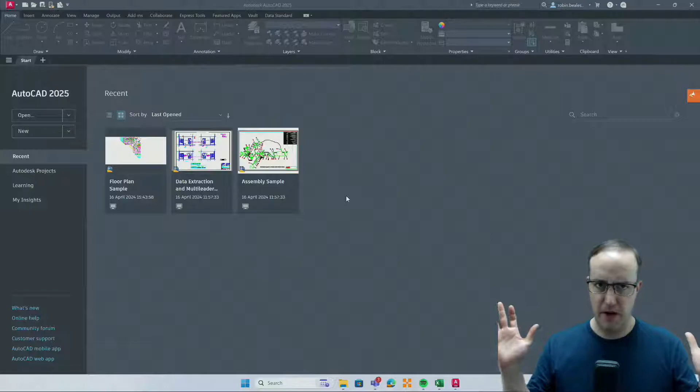So what I thought I'd do today is... I can hear myself. Am I coming through a bit loud? Or is it okay? It's fine. Okay, it's just my voice, clearly.

So what we're going to do today is actually focus on a product that we don't talk about that often. Every time we do these, we're kind of pushing the likes of Revit or Inventor, one of the more vertical Autodesk products, and sometimes we leave good old vanilla AutoCAD behind because there are more modern functions and features that I, as a self-confessed geek, want to push and talk about. But that doesn't mean AutoCAD as an application doesn't still hold a really important part in both construction and manufacturing workflows. And there's so many tools in there that people don't necessarily know about or don't make use of. So I thought today and maybe over the coming weeks I'd just give AutoCAD a little bit of love and go through some of the features that are maybe lesser used inside the application.

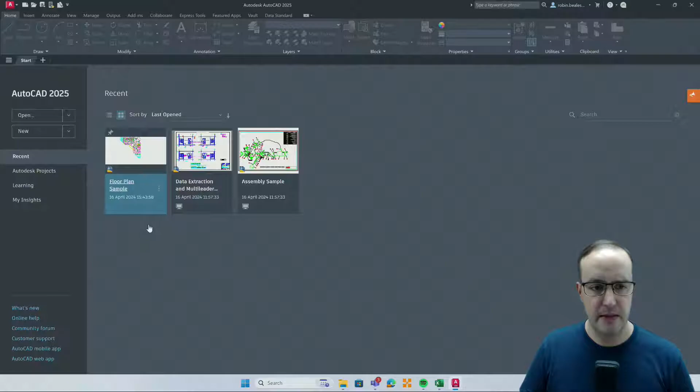Today specifically I want to focus on something called data extraction. Now what data extraction allows you to do is kind of self-explanatory - it extracts data from your DWG file, but you've got a number of controls in which you can tell AutoCAD what data you want to extract and how you want to extract it. So we'll have a little play with those tools today and show you how you can extract data and place it into a table on your drawing, or how you can extract data and link it out to an Excel file. Hopefully that gives you a workflow that, if you're using AutoCAD and DWGs in your day-to-day work and need to do some counting or extract some length or values from an attribute, this should give you a really nice workflow to do that.

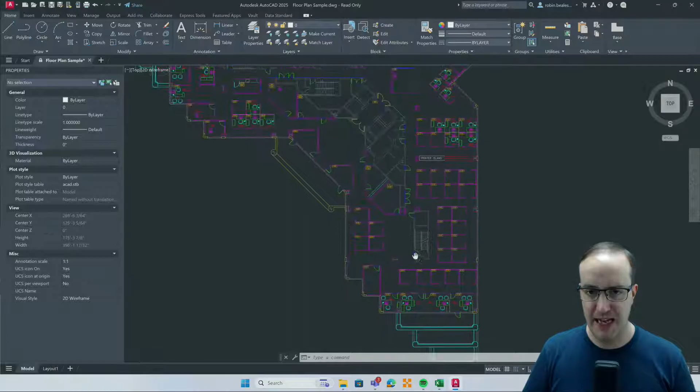So what I'm going to do is make my camera smaller, and then I'm going to share my screen. And without any delay at all, because we've got a button box that works really well, you can see my face in the corner and my screen.

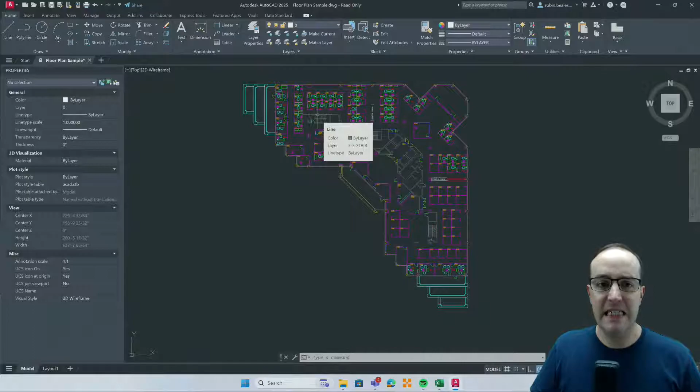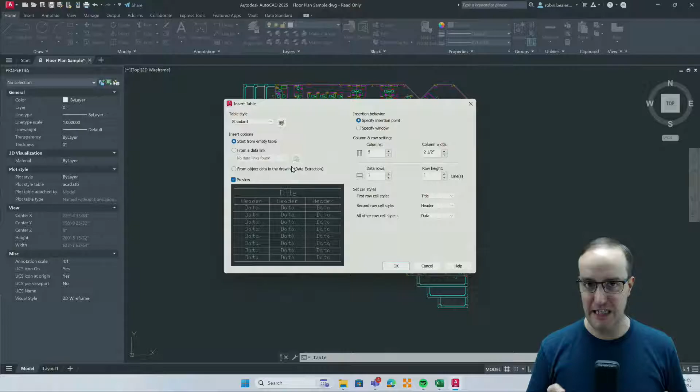So here we are, I'm using full AutoCAD, just plain old vanilla AutoCAD. But data extraction you can use in pretty much any version of AutoCAD. I think it's also in AutoCAD LT - Ellie, perhaps you can do a little check for me while I'm presenting, if data extraction is inside AutoCAD LT as well as full AutoCAD. I'm pretty sure it is, so whatever version of AutoCAD you'll be able to follow this process and work with it. Doesn't matter if you're on AutoCAD Architecture or any flavored version of AutoCAD, but I'm sticking with good old plain AutoCAD.

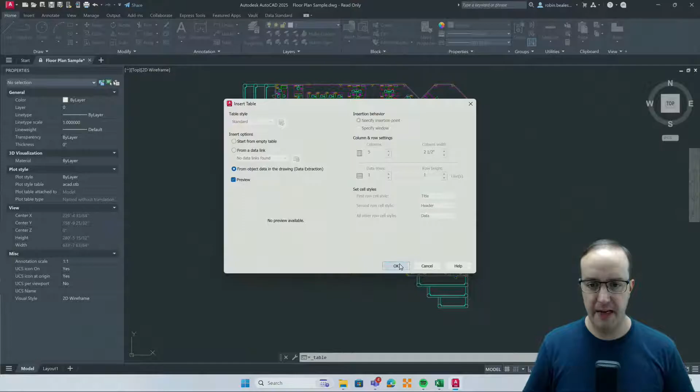Actually, I eat my words - AutoCAD LT cannot do data extraction, so you have to have a full version of AutoCAD. And to start off with, if you've watched these, I do try to air these most Thursdays - not always, but we're going to get better at it. We air these pretty much every Thursday, 2 p.m., same time. And as you'll know if you've watched any of these before, I like to do an example that you can follow along with. So I haven't got an all-singing, all-dancing data set made up with some demo candy in it.

I haven't got a load of singing or dancing demo candy looking great. I'm just going to use either a plain drawing or a sample drawing that you've got access to yourselves, which will allow you to follow along and hopefully keep it really simple and really easy to understand.

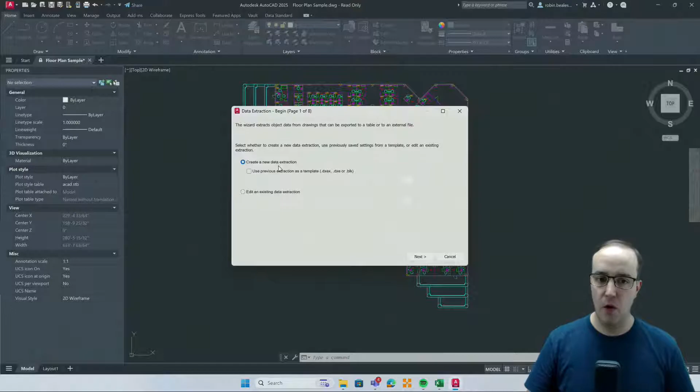So what I'm actually going to do is open this floor plan sample, which will open read only. If you don't have that on your recents, go up to the file menu at the top, go down to open, then sample files, and you'll be able to choose installed sample files and find it in there. I'm just going to open up the floor plan sample as read only, and in here, all I've got is a very simple floor plan.

But the key to the example I'm showing you is we do have a load of different blocks. This will give me my first good example of showing you how we work with this data extraction functionality. So all we're going to do first is just go through the process, and then I think I'll strip back the example and go through it in a slightly simpler way.

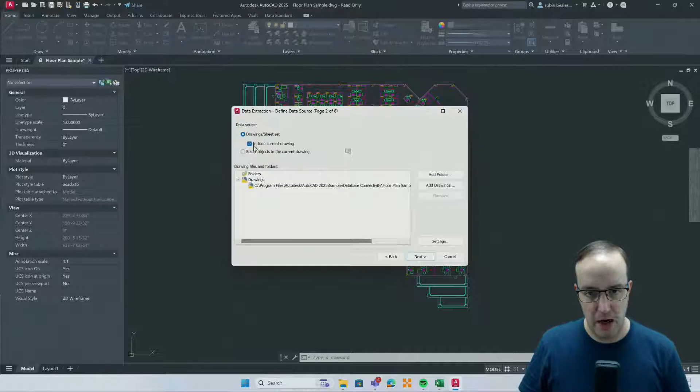So the first thing we want to do is start the data extraction, and there's a few different ways in which we can do that. If we go to the table tool up here, we can say that I want to create a table from object data in the drawing. For me, that's the easiest way to kick this off.

If you're extracting data, the likelihood is you're going to want to place that into a table, whether that's in AutoCAD or in Excel. Really, your first port of call is going to be, let's just get that data out into the table. So go ahead and start an insert table, and from there, go and choose from object data in the drawing.

From there, I'm going to press OK. You'll notice it grays out all of the other options. The reason it does this is because it doesn't know what we're extracting, so it can't tell us how many columns or rows it's going to have, because it's going to be dynamically generated from what you've got in your file. So press OK, and this will start the data extraction wizard.

And this will just talk you through several pages, and on each page, it's going to ask you a series of questions to determine what it is that you want to put into this table.

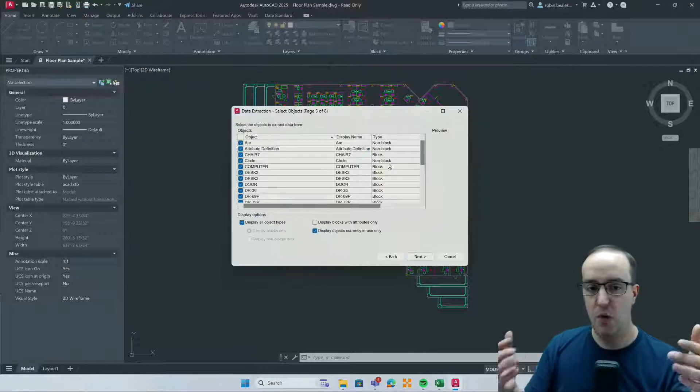The great thing about these data extractions, which I've always liked, is the ability to save basically these next 8 or so pages of wizards. And they're saved into these data extraction files. We can create a new one here, or we can use an existing one.

So I'm just going to say create a new data extraction, and I'm going to go ahead and save it on my desktop as data extraction, and press save. And then what we're asked is, okay, what would you like this data extraction to run on?

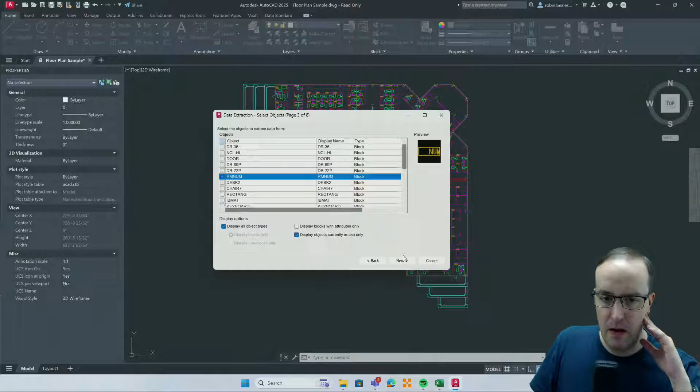Because although I am sat within this floor plan sample, I've actually got the ability to say that I want to run this on a selected area of the drawing, an entire drawing, or even several different drawings in one folder or across a series of folders. So we can set up one data extraction within one file, but have that extracting data from this DWG, that DWG over there, and really whatever the size of your data set, we can handle that using the data extraction process.

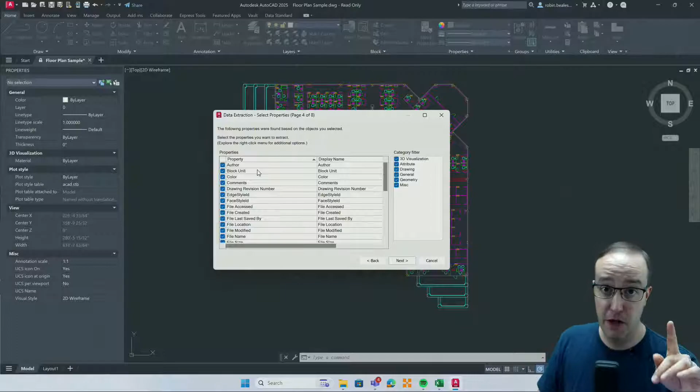In here, I'm just going to say, run it on this drawing for the purpose of today, it really doesn't matter, so just include the current drawing. You can go in and choose settings, and say that you want to specifically look at blocks, and whether you want to extract things if they are within an XREF, so on and so forth. I'm going to leave everything as default, and go ahead and press next.

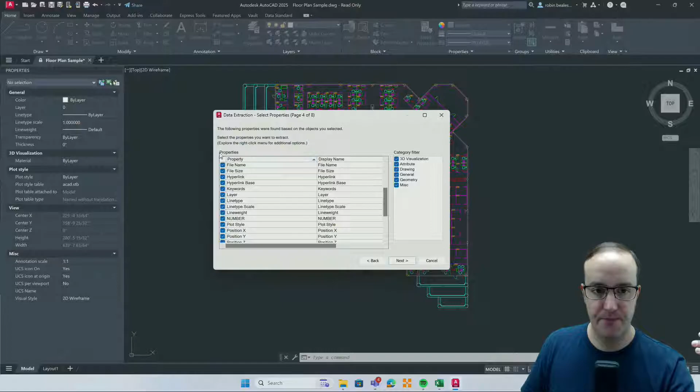This will look in the file that you've got open, in my case, this floor plan sample DWG, and it's now going to give me feedback based on the objects that exist inside my drawing and the type of object that they are. And you'll see that, probably unsurprisingly, we've got arcs, we've got circles, we've got lines, arcs, circles, squares. It's AutoCAD, right? So we're picking up base geometry, but it's also picking up on block geometry as well.

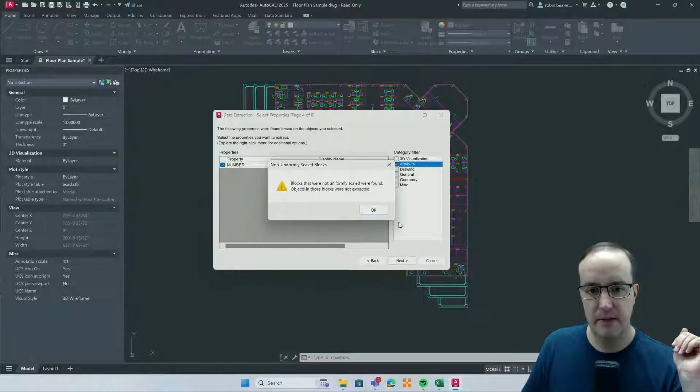So this is giving us a number of components that are either block-based or non-block based. And we can control and define what it is that we want to pull. And dependent on what we're pulling, it will give us different options and different pieces of data that we want to extract, which again is really, really nice.

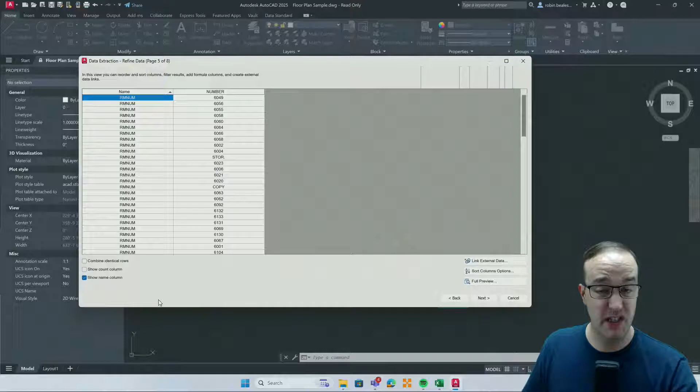So what I'm going to do is go and pick a couple of blocks for the purpose of this. So I'm going to deselect everything to begin with. So let's just go through and unselect everything. Wish it had a select all button. And then once everything has been deselected, I'm just going to look at all the blocks. So let's just stick all the blocks at the top.

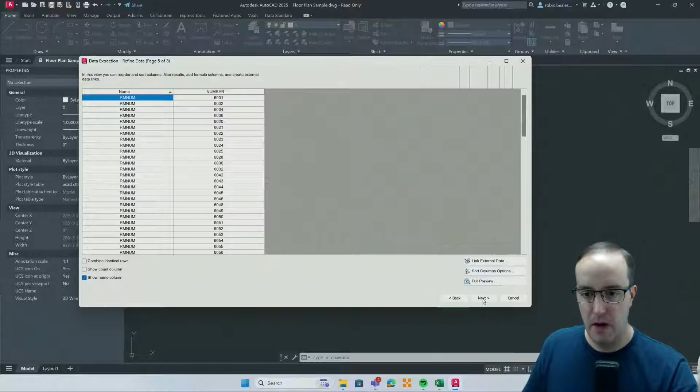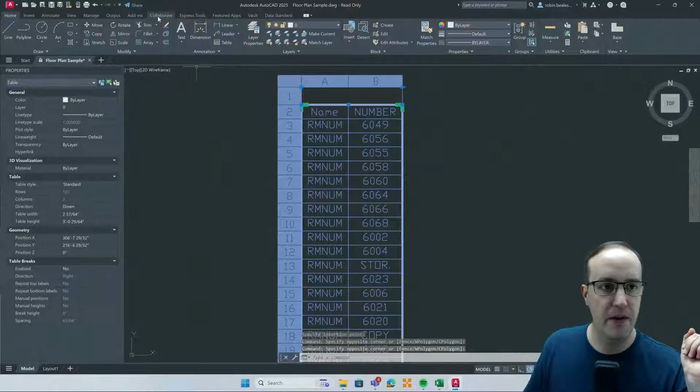And down here, I've got a room number block, rmnum. And then I think somewhere there's a name tag block. I think there was a name tag block, or I might be wrong. It might just be mtext actually from this perspective. So let's just pick up this room number block. Then against that room number, I want to click next. And then this is going to look at that particular object.

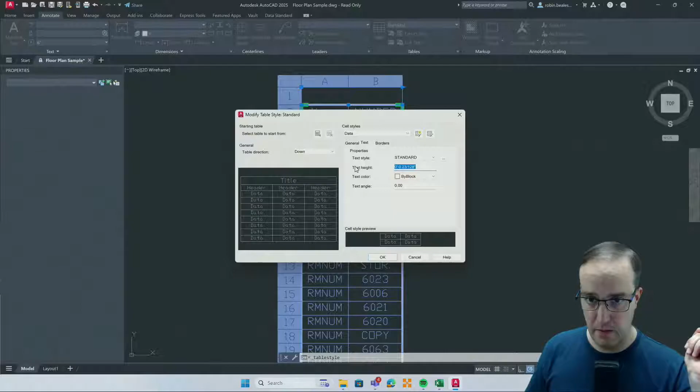And against that object, it's going to show me, okay, here are all of the things that you could pull from that particular block. So in this case, I can pull a number of properties that exist in the block, and I can also pull attributes. And for me, this is the key here: I can pull attribute block data from my drawing and stick it into a table, first and foremost, which on its own is really, really powerful.

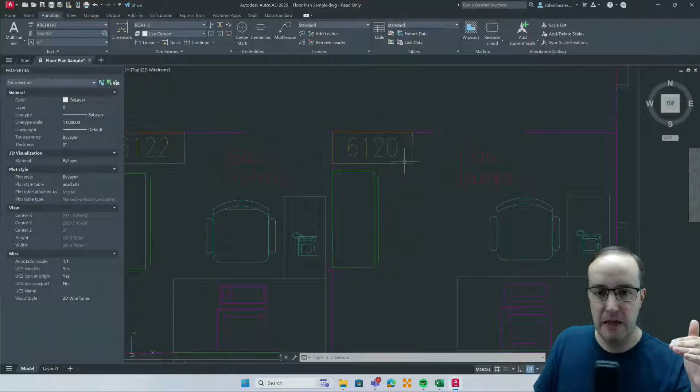So looking at some of these properties, we've got author, we've got the block itself, the color, hyperlinks, keywords, so on and so forth. We also have layer. So because this is understanding that a block is on a layer and has attributes, you could even filter your extraction to be only things on a particular layer or several layers, and we can start working with that data. Again, what I'm going to do is deselect a lot of these.

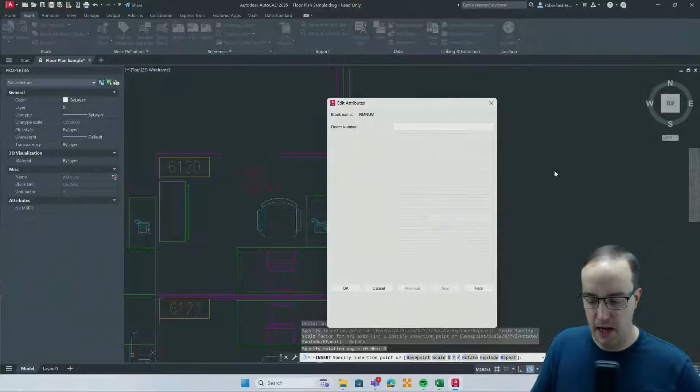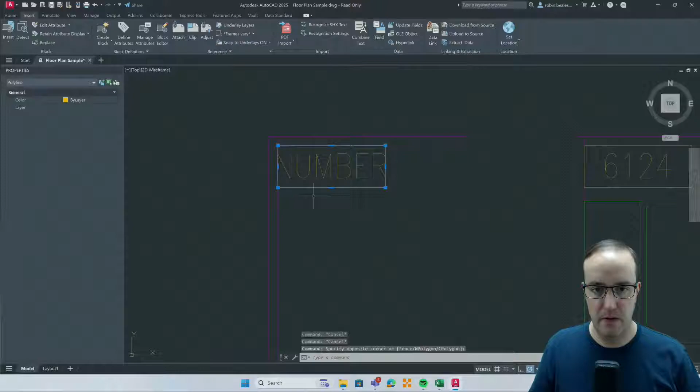You've got some filters on the right, so I can literally just say, do you know what? I just want to see the attributes in here, which are text-based attributes that are stored on that block. And I want to pull the number. I'm going to go ahead and press next. And then this is going to give me a list. So it shows me a count, a name of the block, and then my number, the number being my attribute.

I don't want to combine rows that are identical. I don't want the count column because it's going to be 1 for everything. And we don't really need the name column, but I'm going to put it on there. And what this is doing is it's showing me the block name and then any attribute value that comes next to that block, which is great.

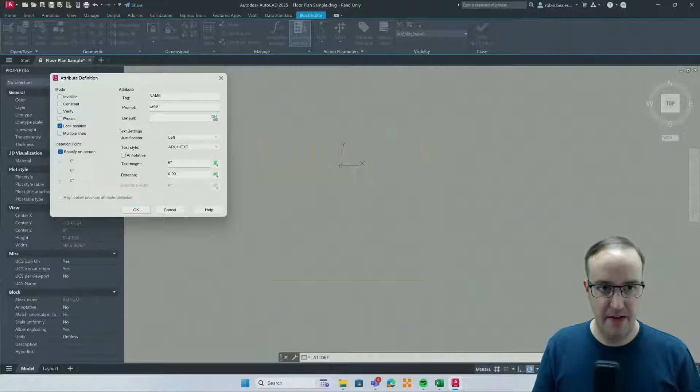I'm just going to go ahead and press next, say that I want to insert it into my drawing. Gives me a bit of a preview. I'm going to use the standard table style here. It's probably going to come in a little bit small. But if we just go next and finish, I'm going to place it over here.

If I just select it, grab the table style that it's using, which is standard, let's just modify that table style to make it much bigger for the purpose of this. Let's go with text, oh horrible, inches, something like about 25.

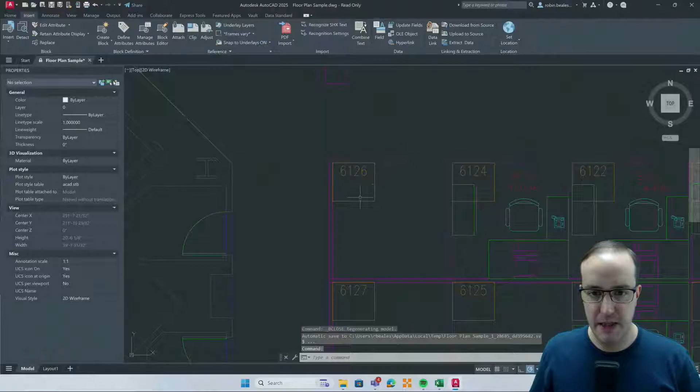And then I'll tell you what, I'll leave it small rather than going in and editing those and making a mess of things. I'll leave it small. So what I have is an AutoCAD table that's basically showing me all of my room numbers. At the moment, pretty useless, right?

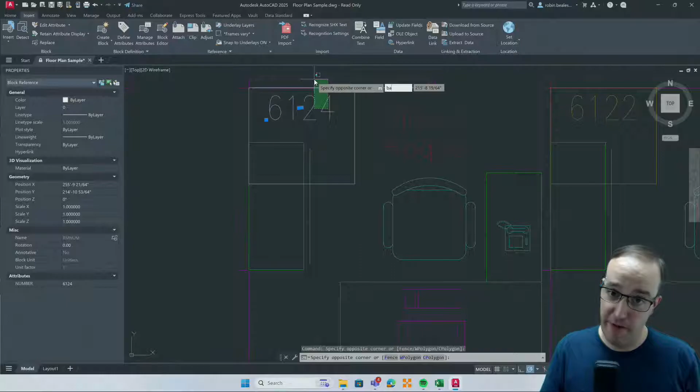But actually, imagine that your blocks are a little bit more intelligent and they've got a little bit more information on them. So if I come down here, these are my room number blocks. Okay, so this is what I've got. I've got a block that when I place that block, it's going to allow me to put in there the number of the room. So the way that works is I go to insert, I choose my room number block, which is there. I place it in and it will ask me what my room number is.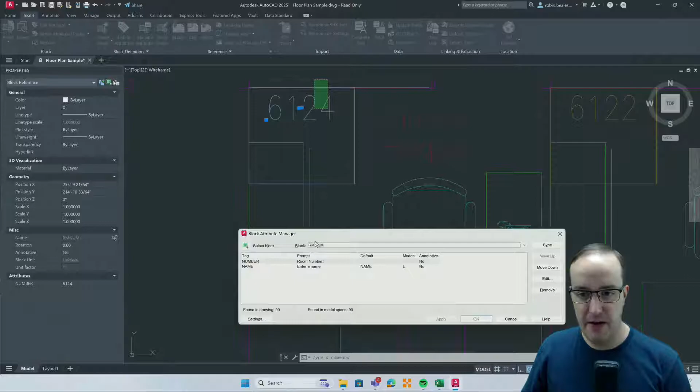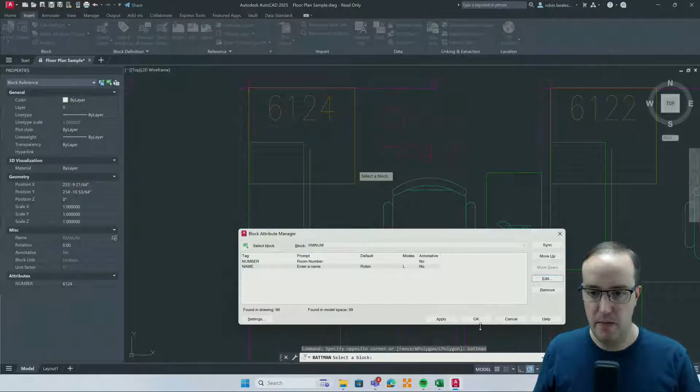The reason that works like that is because of the attribute that is assigned to the block. So if I grab this particular block here and choose to explode it, you'll notice that we have a piece of text here and that we have our rectangle with it. If I select the block and choose to edit the block using the block editor, yellow on grey is not great, we have, again, the rectangle and then our attribute, which is number.

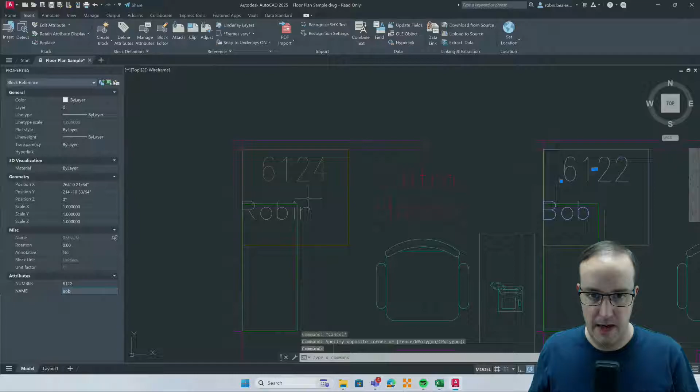I'm actually going to make this a little bit bigger. So I'm just going to stretch it down. I'm being very nondescript with the sizes, but I'm going to stretch that down and then I'm going to add a new attribute. To do that, if you've never done it before, we come up here and click attribute definition. This opens a little dialog box that looks like this, and then I can give that attribute a tag. I'm going to call it name.

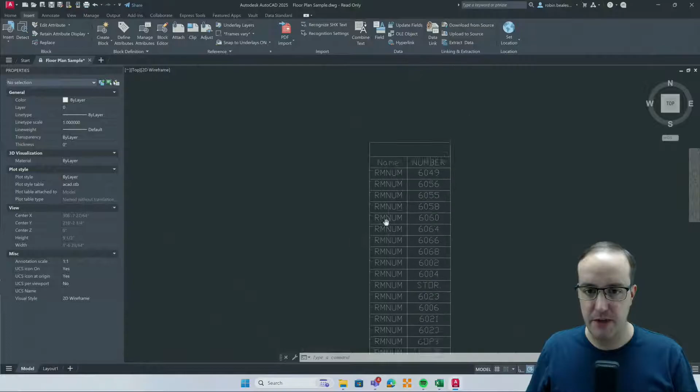We can give it a prompt, for example, enter a name, and then I can give it a default. Again, I'm just going to put name in there. We can choose the text size, the justification, whether you want that to be invisible, so we can't see it in the drawing, but it's there and we can pull it. A constant value, so it's always the same, so on and so forth. I'm going to press OK, and I'm just going to choose to place that just down here, like so.

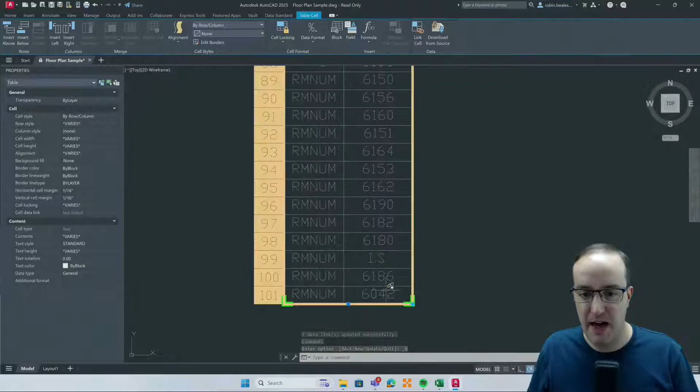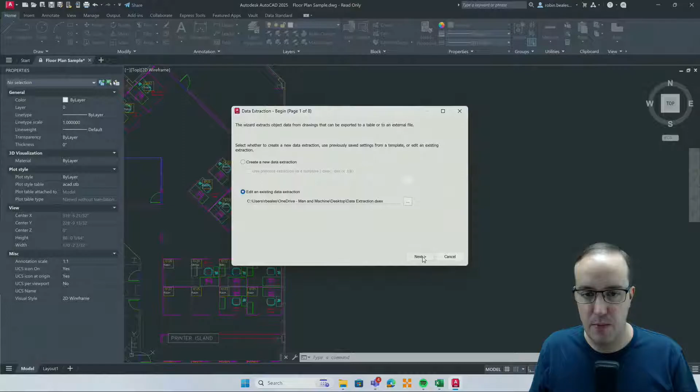So we've got our number and name, and then we've got our value there, which looks great. So I'm just going to save that. I'm going to close it, and you'll notice that the blocks that I have here have all updated. Now, I'm not going to go through and make you watch me enter names for every single room, but what I am going to do is select a couple of these, and I'm going to add in information, because I've already got a piece of MText here, which is showing me the individual that sits in this room.

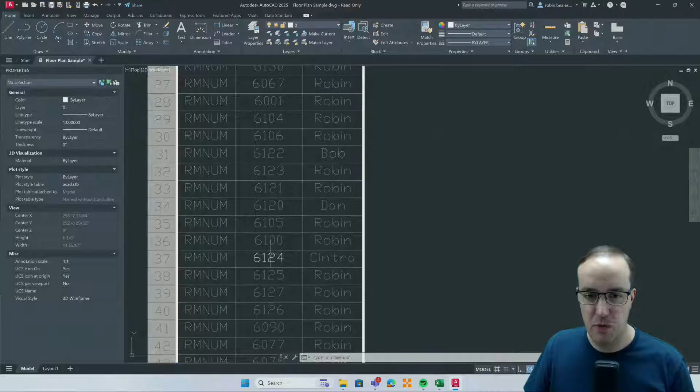So I'm going to select the block, and I'm going to type in my favorite command in AutoCAD, Batman, B-A-T-T-M-A-N, block attribute manager. And what that does is it allows me to pick up a block and start controlling the attribute values and changing them. Because I've already placed it, it's not going to prompt me for the attribute value. But by starting the block attribute manager, Batman, I can then say that I want to select a block. And against that block, I can start defining both the name and the number. And I can edit the values for that name and number.

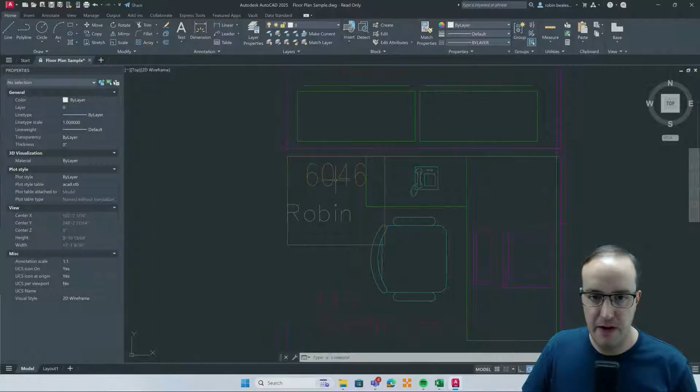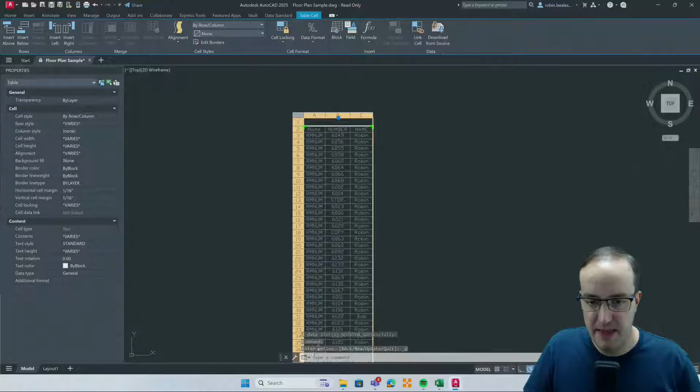And I'm going to give it a value of Robin. Press apply, press OK. And you'll see it's put, I didn't want it to put my name in all of them, which is a little bit annoying. It's put my name in all of them, but then I can come in and change some of these. So let's put Bob in here. Let's put Sintra in here. I'm just going to do a few of these and Dan in here.

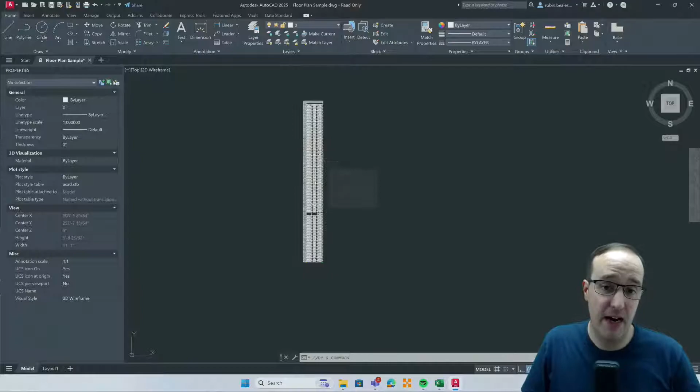As I start pulling this data through, I'm going to go back to my data extraction. So I've got this data extraction set up that's been pulling into this table. And I've got the ability to come in and look at this data extraction, and I can update it at any time. So I could say download from source, and it will re-download my data extraction. But what it's not going to do is understand that there's more attributes inside those blocks now.

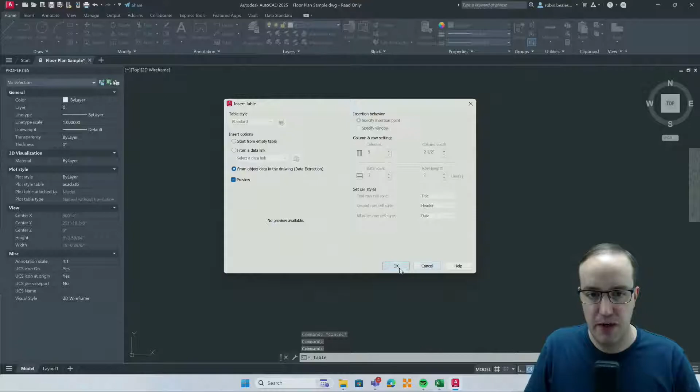So I'm just going to go through the process again. So I'm just going to take this data extraction. I'm going to delete it. I'm going to insert another table. So Home, Table, from a data extraction, press OK. And this time I'm going to say use that existing data extraction that I set up and placed onto my desktop. Leave everything the same, still pick up my room name, but now I want both the name and the number attributes inside of my drawing.

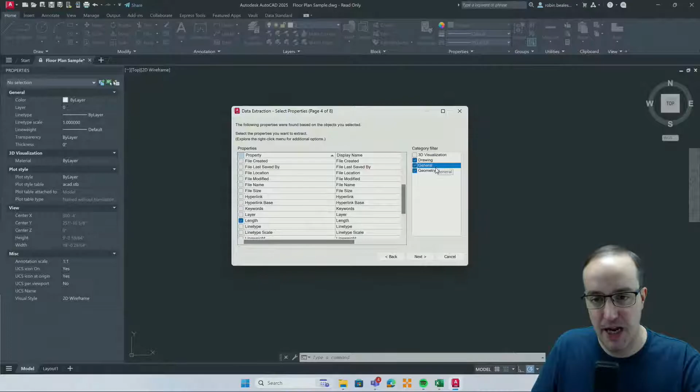Let's just finish that off and place that down. Yes, we've got a load of duplicates called Robin because I pushed that attribute en masse to all of the individual blocks to update them. But you can see here the individual 6120 is Dan and 6124 is Sintra. And clearly they are the ones that are in the model. So we are live extracting data from our file.

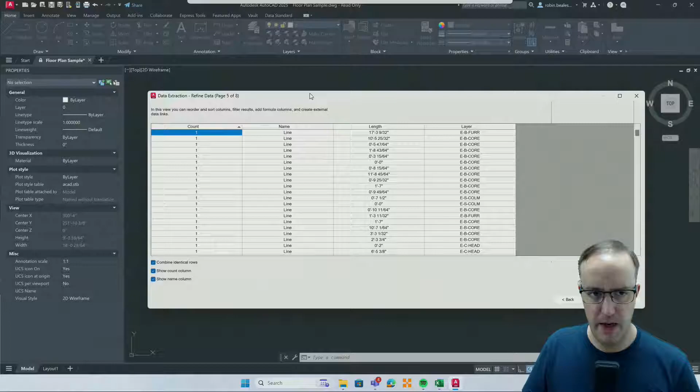If I find room 6049, 6049 is here. So let's find 6049 and let's change the block here. This is Eric Washington. So let's put Eric's name in there. And against that name, I've just literally typed that in. Okay, so let's come back to our data extraction.

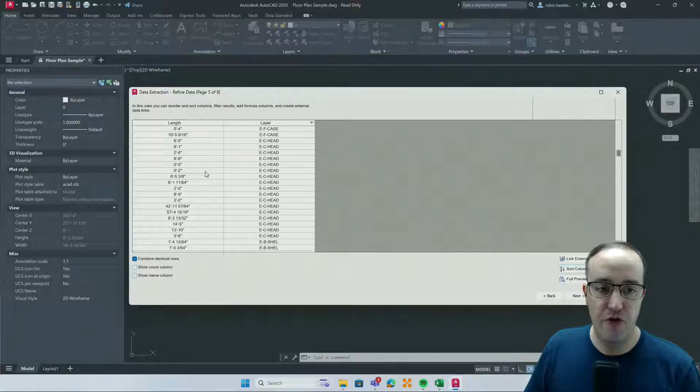Let's select our table like so. And then we're going to say that we would like to select the whole table, not just a cell. You can't just select an individual cell. Select the whole table and choose download from source. When you download from source, it should say, you can just about see that on the command line, one data link updated successfully.

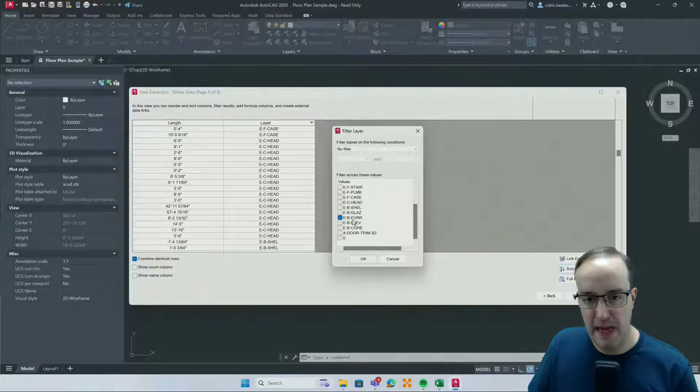The other thing that we can do here is we've got all of these walls. So these lines are on the layer called E-B-FURR. Why they're on E-B-FURR, I don't know, but they're on E-B-FURR. So I'm going to create a final data extraction using a table. From a data extraction, press OK. Creating a new one. Let's call it data2.

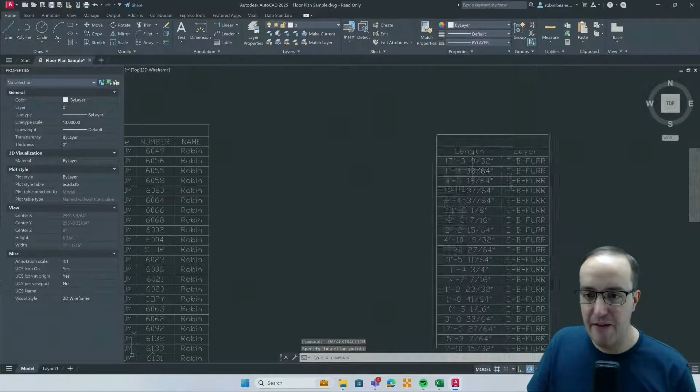And this time what we're going to do is we're going to pull geometry. So don't display all object types, just display non-blocks. I only want to have in here lines. Press next. And then from here, I only want to see the geometry length.

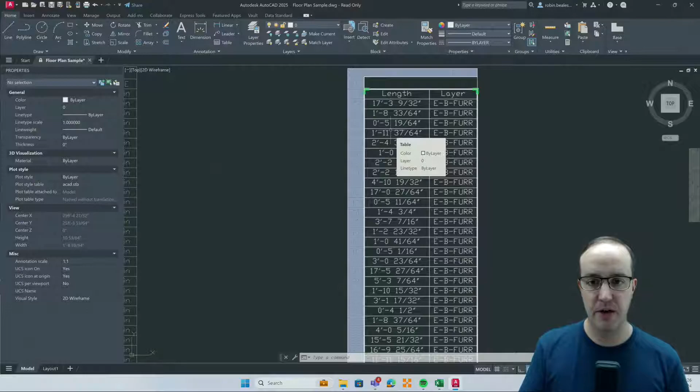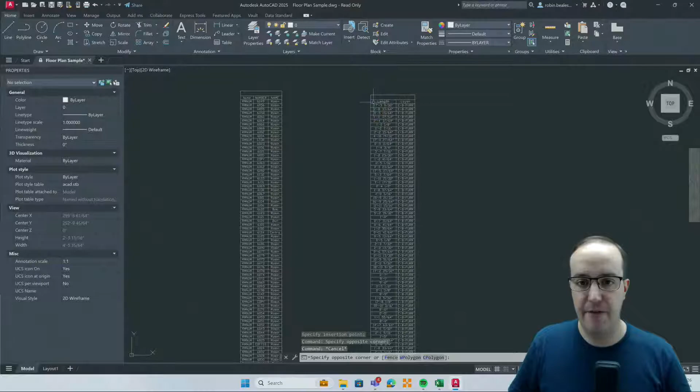Now this is quite a far-fetched scenario because I'm not the author of this file. I don't know the quality of the drawing. I don't know if there's several lines sat on top of one another, so on and so forth. But what I'm going to do is I'm just going to pull the length of each and every line that I have. Let's also put the layer in there, sorry. So let's also choose the layer. So the layer and the length.

And then in here, I have a list of all of those lines, all of their lengths in imperial rather than metric, which is going to confuse me because my brain only works in metric. We don't want the count column, and we don't really want the name column. But then on the layer column here, we've got the ability to start looking at what we've got. This is just including every line at the moment.

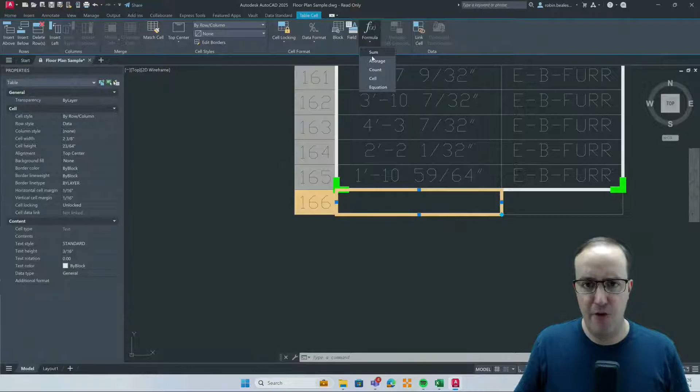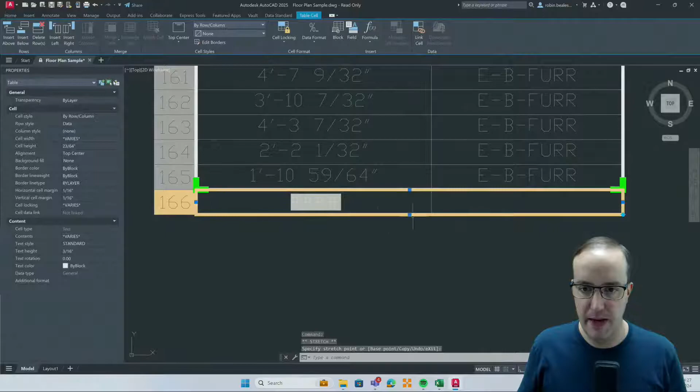So I'm going to come in and say sort column options. We can say that we want the layers ascending or descending. We can control them in any way, shape, or form that we want to. But I can also come in and start filtering them. So if I right-click on these columns, I can also filter the data extraction. And I could say filter based on a piece of text.

So the name of the layer might be XYZ, or it might contain the name wall, or whatever it might be. We can really be quite nondescript in here and really control this in any way that we want to. Here's my E-B-FURR. I'm going to press OK. And what this will do is it will filter, so it's only showing me those lines.

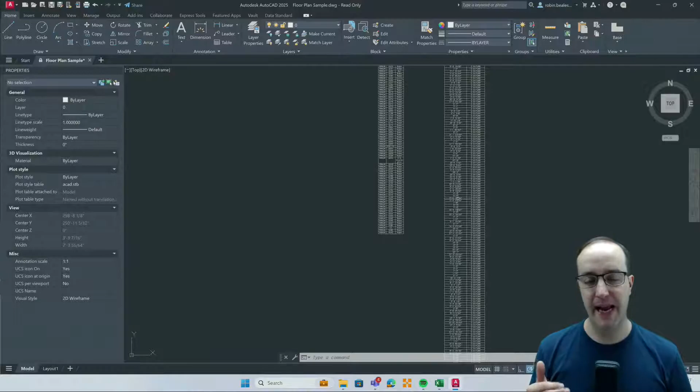If I press next and I say input into the drawing, I'm going to say next again, leave everything as it is, and just hit finish. I now have a list of every single line inside of my file and the length.

So if you've got a really accurately placed slab in an architectural drawing, you could get the perimeter of that slab and start looking at, okay, well, if I've got several slabs and they're all polylines, I can very quickly get the perimeter value for every one of those, or the area value, or whatever it might be, and start doing things with it. Because this is a table, we can also start adding columns to here.

So although I've got a data extraction, it's just an AutoCAD table. And with that table, I can come in and insert cells to the left, I can insert cells to the right, and I can start doing things like have calculations in here. It works just like Excel.

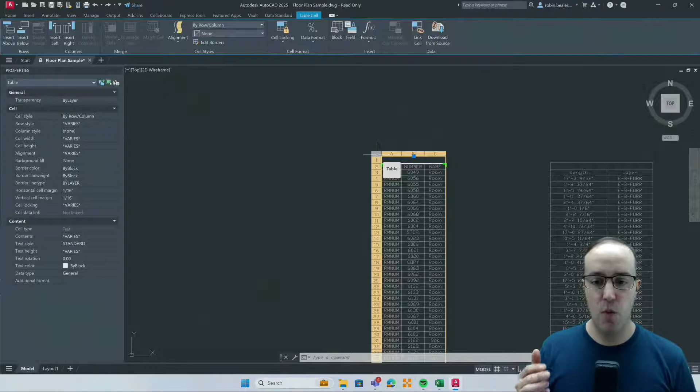So I can come down the bottom here, I can insert a row below, and then in that row, you'll notice it doesn't have those green marks around them. It's not included within the data extraction, but it is at the bottom, which is great because I can add and amend and change this row without affecting the data extraction above. And then when you're in here, I can basically just start working with this in any way, shape, or form.

Let's just unlock this cell. And then in here, it works similar to Excel. If you can use Excel, you'll be able to use this. But you can add formula in here. You can start doing this as you will. So I've just said, go ahead and add a formula. It's put in a sum for me. So let's just say this is A1 to A1666 as a sum.

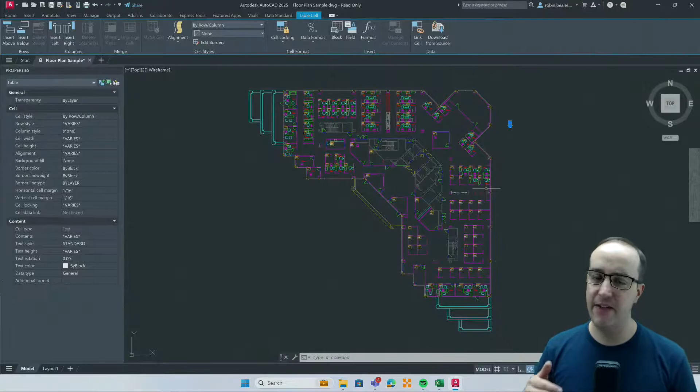And then let's just make that column a bit bigger, or should I say a lot bigger. Let's just drag that out. Not quite like that, Robin. Let's drag that out and try and look at that value. It's not calculating it. It's probably my mistake there. But you can start adding some calculations in there and start adding some sums and get it to start giving you feedback. So we've got two things there that are really quite beneficial.

Number one, within reason, you can extract anything from your drawing in AutoCAD onto a table. Those tables can very quickly be pushed out into Excel, either from the data extraction wizard itself, or just by grabbing the table and working with the table and extracting that out to Excel. Really straightforward. The other thing you've got the ability to do is start using that to your advantage. So if you've got blocks with attributes in, you can use those to start pulling.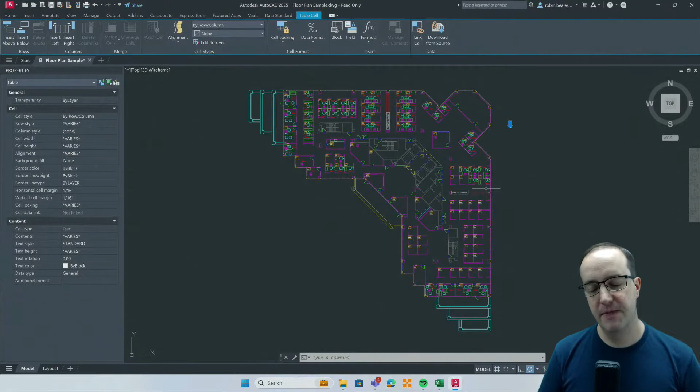If you're a manufacturer and you've got blocks with manufacturing information against them, like part numbers, or it's a piece of sheet metal and you've got the thickness associated to the block, we can start pulling that information and build simple BOMs. If you're architectural or construction, we can start building simple quantities. It does depend very much on the quality and the accuracy of your drawings. But fairly quickly, certainly within a handful of minutes, we're able to extract information from our files live and without any problems at all.

And really, that's kind of all I wanted to show. It's very accessible. Hopefully with these examples you've seen, okay, I can extract data. And if just a few of you go and have a play with that and go, crumbs, do you know what? We had someone before that was coming in and having to manually count these. We can do that with the data extraction. As long as you don't have blocks over blocks over blocks and things like that, then it's going to be accurate.

And you might have blocks overlaid to show that you've got vertical stack of those blocks in a 2D space. But as long as that's okay, the calculation is going to tell you that, well, hey, you've got 3 of those filing cabinets sat on top of each other, and these are the different attributes from each one of those filing cabinets. So really powerful. It's been in AutoCAD, feels like forever. It's not quite forever. It was early 2000s, I think it went in there. But really useful tool. Have a play with it if you haven't.